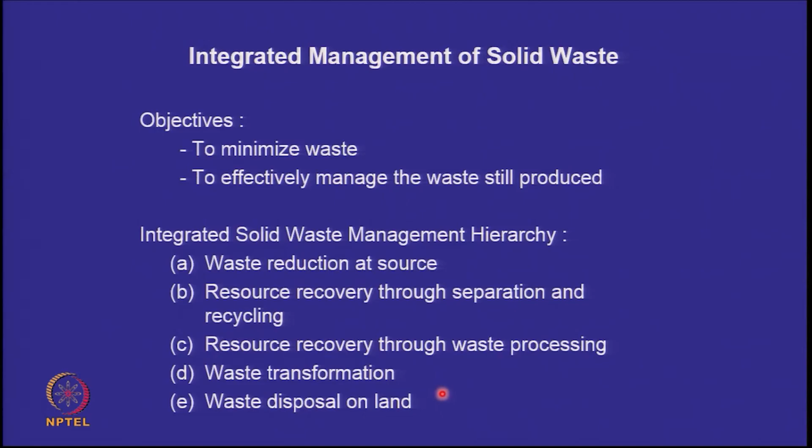And we said that an industrialized society is taking energy and raw materials from the environment and giving out solid waste. The solid waste is produced by the industry, and the solid waste is produced by the consumptive processes in a city.

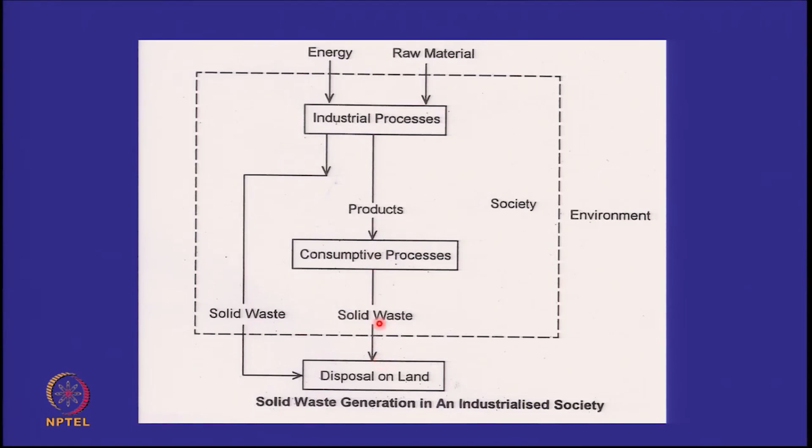And if we apply the principles of integrated solid waste management, we can apply them here to reduce the quantity of waste coming out and sending back the material and the energy to reduce the energy and raw material required by the industry. And similarly, after the consumptive processes, we can send back the material which we can use for recycling, or we can send back the energy by burning combustibles, we can therefore reduce this.

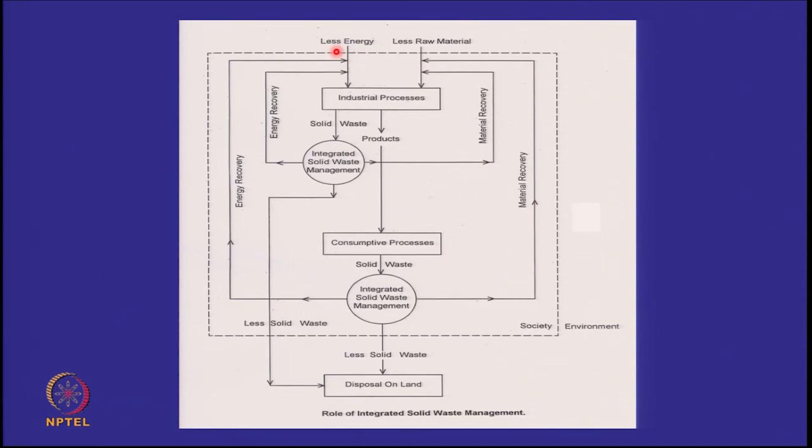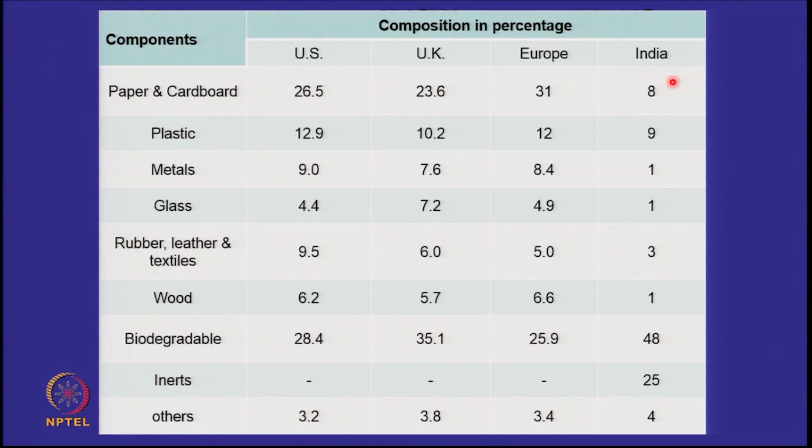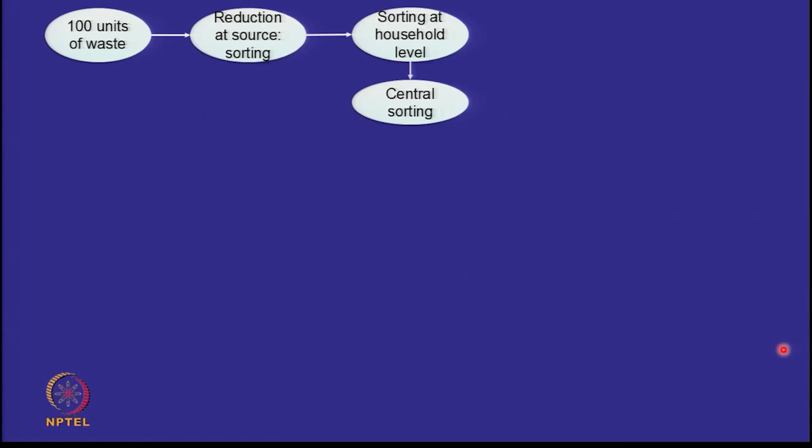So let's recall that we said last time in India the waste composition looks like this. And let's see if you conceptually apply this integrated solid waste management, what can we do? Let us assume that we have 100 units of waste. Then we can reduce the quantity of waste by sorting at the source. This can take the form of sorting at the household level, that means within the houses, and after sorting at the household level, further reduction can also be done at a central sorting unit. That means at a facility where this waste reaches from the various households.

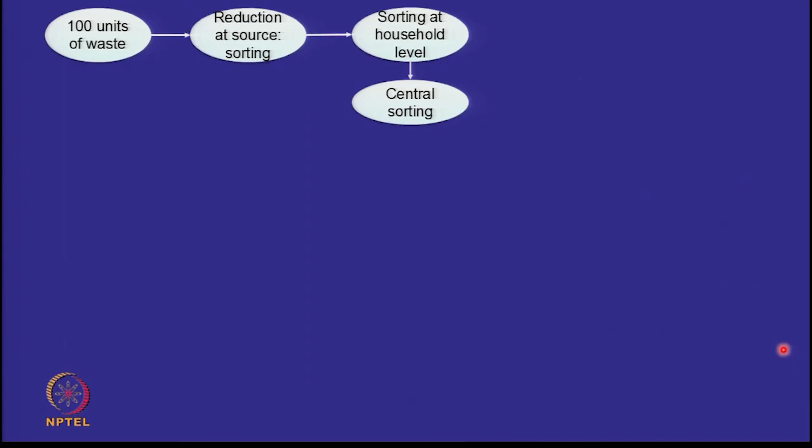At the central sorting facility, you can do manual sorting or mechanized sorting. Manual sorting typically means that the waste is moving on a conveyor belt, and you pick up the various items manually by hands. You are of course wearing gloves, and you are having some kind of a mask to prevent any pollution while you are doing manual sorting.

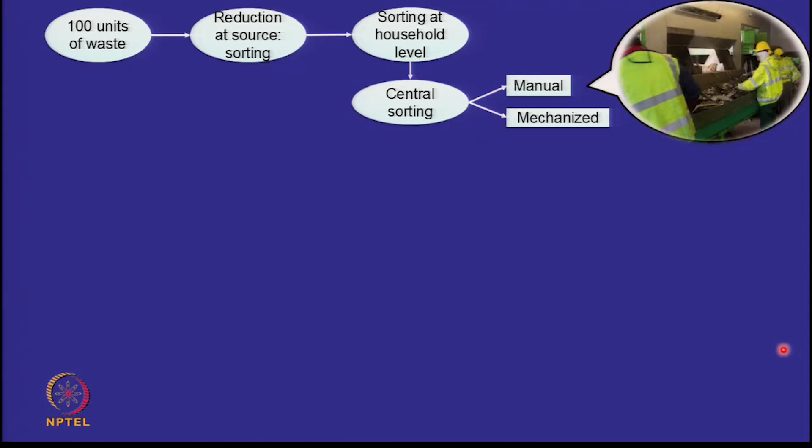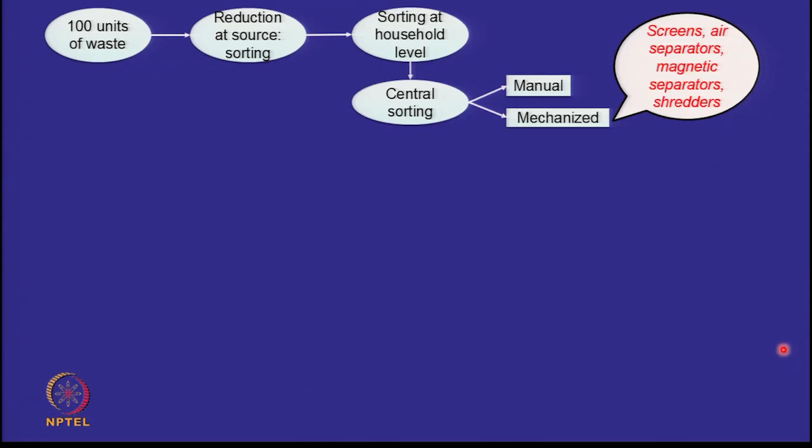The other way of doing sorting in the central plant is by using mechanized equipment such as screens and trommels, air separators which will separate out the lightweight material, magnetic separators which will take out the metallic materials, and even shredders which will cut open the plastic bags to release the recyclables inside the plastic bags. So about 10% of the waste can be reduced by sorting at the household level and at the central sorting unit.

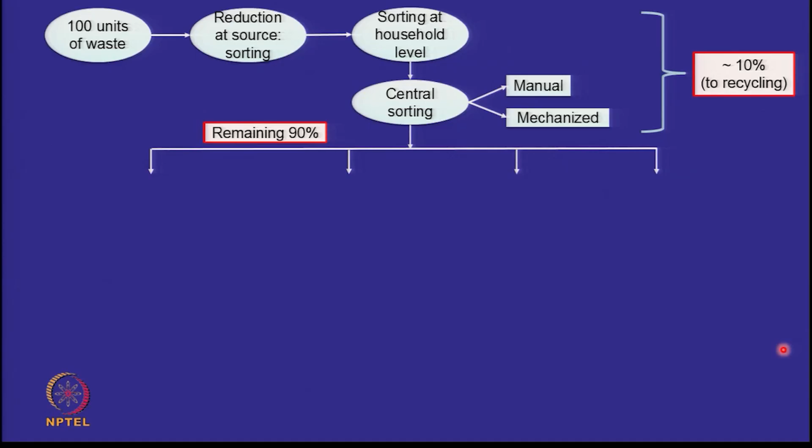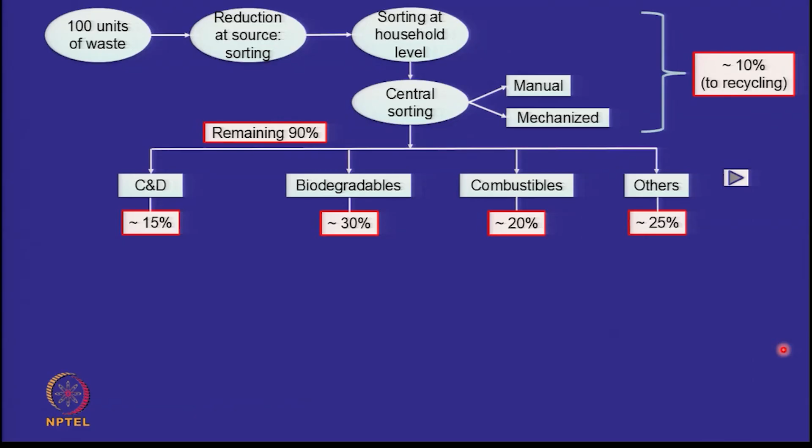The remaining 90% of the waste would be C&D waste, biodegradables, combustibles and others. Typically, the C&D waste may be 15% of the total waste. The biodegradables comprising of the food waste and other waste such as wood and other garden trimmings would be about 30%. The combustibles, which could typically be paper, plastic, cloth and textiles, could be 20%, and others could comprise of intricately mixed material which cannot be separated out into the individual components for recycling.

So, the C&D waste can be sent to a C&D processing plant where it can be processed for reuse in construction. The biodegradables can be sent to a composting plant or a biomethanization plant where the output would be compost, which can be used by the farmers, or the output could be methane gas, which can then be used for producing power.

The combustibles can be sent to a waste to energy plant for generating energy, or the combustibles can be compacted and converted into refuse derived fuel, either in the form of pellets, or it can remain in the uncompacted form as fluff.

Now, at each of these plants there will be some pre-processing rejects, because all the material which reaches the plant is not 100% processable by the equipment in the plant, and after the processing is over there will also be post-processing rejects. For example, when you are doing composting, then after the composting you might sieve the material through 4 millimeter sieve, and the finer material may be the compost and the coarser material may be rejects.

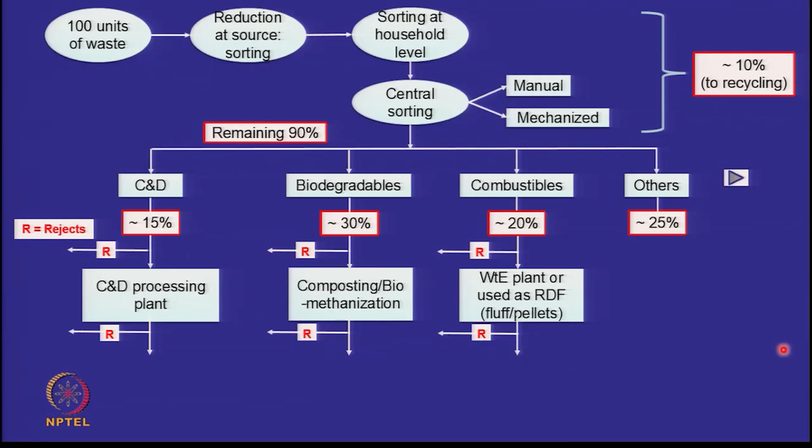So, the product will be the bulk output and the rejects will be the minor output. Typically, all these rejects will go to the landfill, and the rejects which were coming from the others as well, because it is too intricately mixed for reuse, will also come here. So, all these rejects as well as this reject will go to the landfill.

Now, let us see: we started with 100 units of waste, how much of it is going to go into the landfill? We have 15% C&D, and you will have about 15 to 20% rejects. So, 3 units are rejected. Similarly, out of the 30% biodegradables, 8 units are rejects. In the combustibles, you are having 5 units as rejects. So, if I total all these, 3 plus 8 is 11, plus 5 is 16, and 25 which are intricately mixed and cannot be separated, about 41% of the material has to go to the landfills.

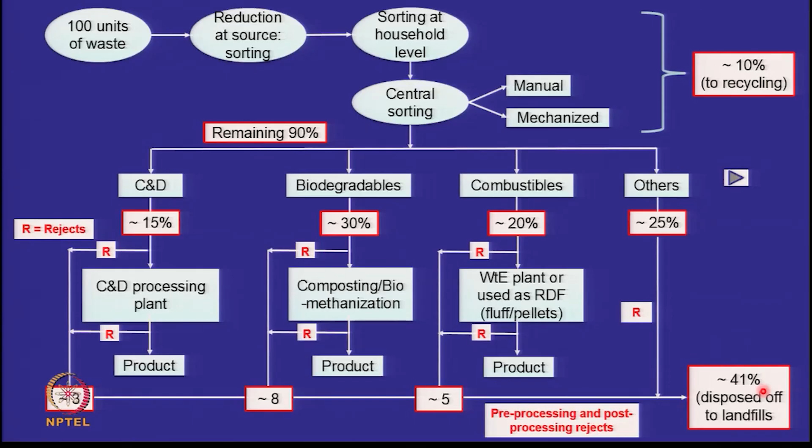So, what good integrated solid waste management does is to reduce 100 units of waste to about 40% or less, and therefore, the size of landfill required is lower. I think I have another diagram here which we can go through. I don't know how clear it is, but it essentially captures what I said.

We started with 100, and we did source sorting, intermediate, central sorting. 10 went back for recycling. Construction and demolition 15. Special waste, sometimes you can't do anything about it. Combustible waste, biodegradable waste. The figures are different here from what we've written on the board. That is not important. What is important is to recognize that there may be some hazardous waste and there will be some mixed waste.

And not shown in this diagram, and that is erroneous, is that from each processing unit, no, it is shown here, from the biodegradable waste you will get rejects. Not shown in the combustible waste, you will have pre-processing rejects as well as ash. Post-processing reject of a waste to energy plant will be ash, and pre-processing will be all that material which they think will not burn. They will return it or say, please take it away. So in this diagram, I think it's about 45.

And this diagram also says or presumes that your city will have 3 types of landfills: the hazardous waste landfill, the non-hazardous waste landfill, and the inert or the construction and demolition waste landfill. And this material will reach these locations.

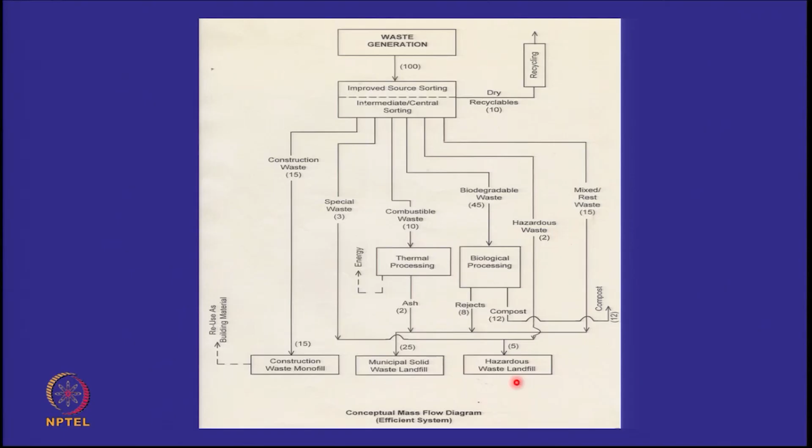So I'd like to look at some recent initiatives in Delhi. We've been trying to process waste for quite some time in India. I mean, the last 20 years we have made lots of investments into waste to energy plants, composting plants. Many of them have been unsuccessful. In fact, it is the rare processing plant which is successful, and the main reason has been the quality of waste reaching the plant. You cannot send mixed waste to a waste to energy plant.

So you will find Bombay City signs a contract for waste to energy. Lucknow signed a contract for waste to energy 10 years ago. It didn't work. I already gave you the example that Delhi did it about a couple of decades ago. It didn't work. So if you send them only the combustibles or the better types of waste, that is what will work. And then the plant has to be designed for those combustibles. If you send them mixed waste, which is predominantly wet, it's not going to work.

And a large number of composting plants have also not worked, because it's not just about composting the whole waste. Once you compost the whole waste, it is going to have wires, it is going to have plastics, and a farmer is not going to pick up that compost. He wants a very high quality compost for his fields. So composting plants have also not worked. We'll come to that later.

But the more recent initiative is that we have 2 construction and demolition waste processing plants in Delhi. Please note, the moment we get into the C&D field, we are able to almost remove 25% to 30% of the waste from the main waste. So that's a huge reduction. And what do you do with C&D waste?

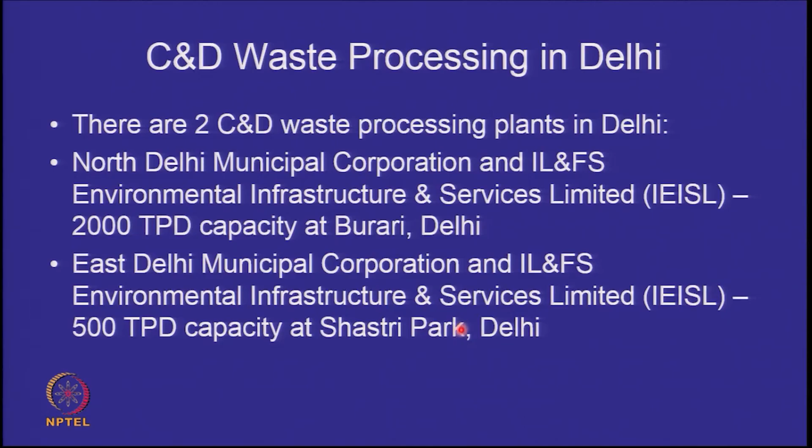So just a few photographs from the Burari plant. So what does a construction and demolition waste plant do? It gets the waste, it crushes it, it removes the metals and the other materials like pieces of wood, and then it sells off this crushed waste by first screening it. Maybe you can get sand out of it, maybe you can get gravel out of it, coarse aggregate, fine aggregate.

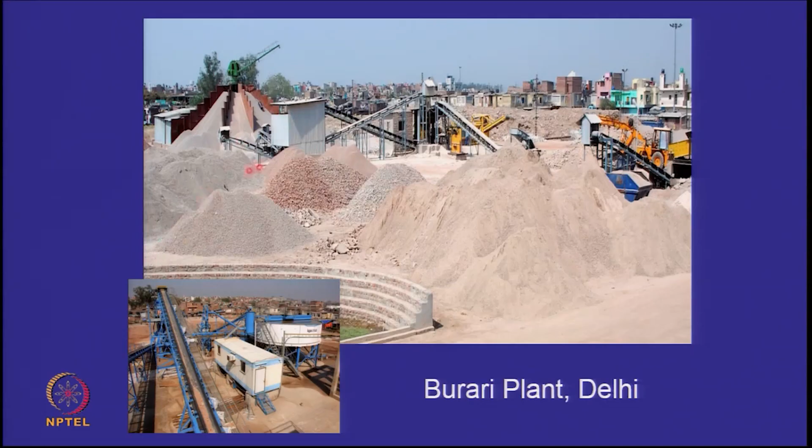So you can see a variety of heaps here. So it's like a crushing and screening plant. The waste will come, it will go to some crushing units, then it will be screened, and then it will be collected and sold off to various people. And sometimes you can also make an end product. So this is the waste which comes in typically.

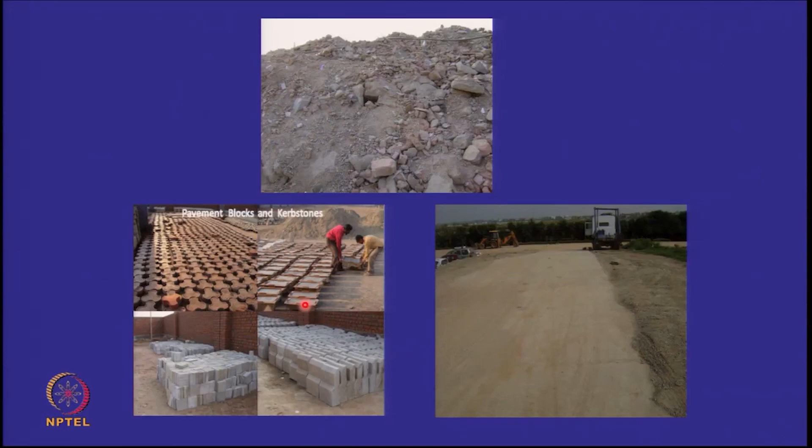If you don't want to do a very high-end job, you don't want to make high-strength concrete from this aggregate, but you can make paver blocks. Paver blocks don't require a very high quality of input coarse and fine aggregate. So they are making paver blocks here.

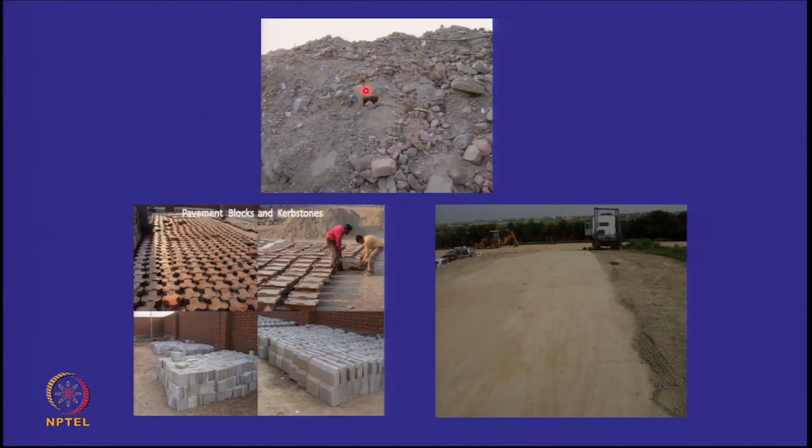Here, the finer portion of the construction and demolition waste, because many times construction and demolition waste will also have some soil mixed in it. When you demolish a building, the foundations will come out, you will be excavating it. When your excavator is taking out the waste, so they have used that finer material in road construction.

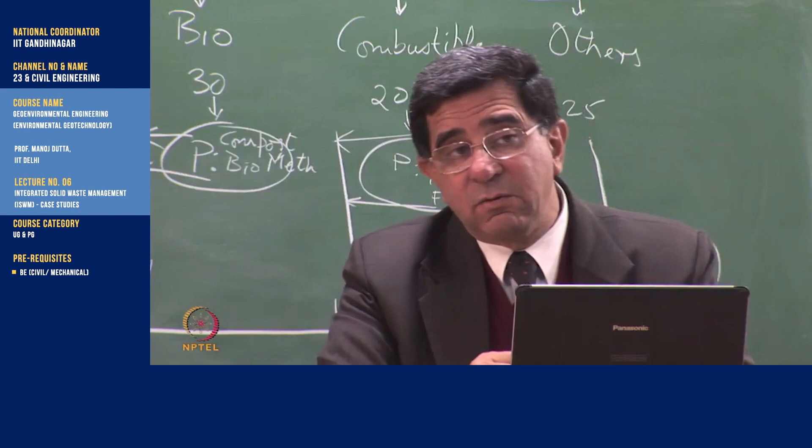So we looked at construction and demolition waste. This plant is now doing well. I think the whole issue is about how you price it. If you are going to price recycled material, should it be lower than the original material or higher? Suppose I can get sand at X hundred rupees per cubic meter. Now I have recycled sand. Should it be less or more?

Yeah, so if I am getting natural sand at 500 rupees per cubic meter, and I start selling my recycled sand at 700 and say I am green technology, sustainable, environmentally friendly, you are making a house, you may be as friendly as you want, I am getting it at 500 rupees, why should I buy the sand at 700 rupees?

So the criticality is, can we price it lower? And if we can't price it lower, let's say 700 rupees is the cost of production, then what is the alternative? We have to be subsidized. And who will give the subsidy? The government. That's where I talked about the hierarchy of waste management options. The maximum subsidy should be given to making recycled materials sustainable. Subsidy should not be given to make landfills cheap. Because if you make landfills cheap, all the waste will come to your landfill.

So we have to reprocess that. So as I said, Burari is successful as long as the pricing becomes successful and the subsidies become successful, which is a huge gray area.

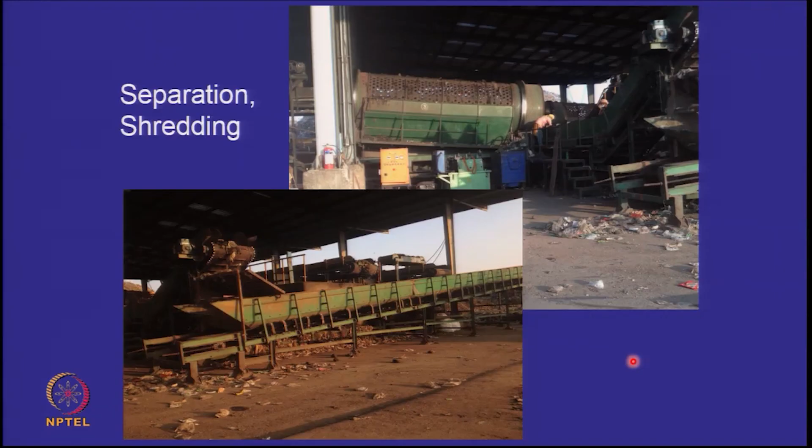So here, what happens? This is the finer fraction, I think this is 20 mm down, of the waste which has come in through trommeling.

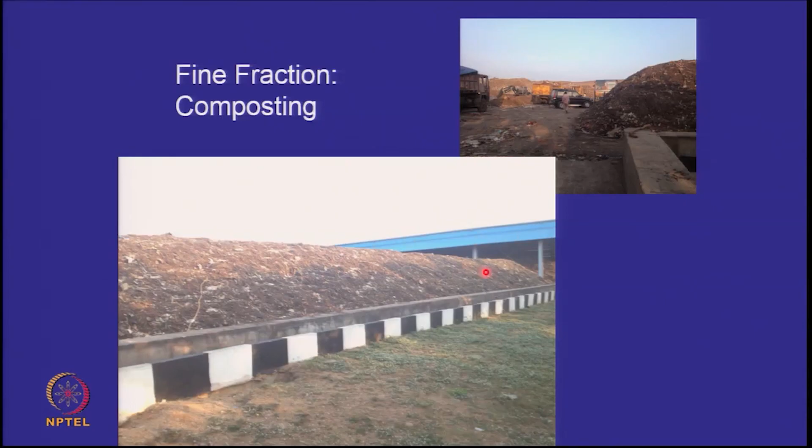Eventually the compost is filled up in bags, available to you like a fertilizer bag. You can see inside the fine compost. There are pre-processing rejects which come out from the screen, and post-processing rejects. After composting is over, they again pass it through the screens, because people buy fine compost - they don't want coarse, sand-like material that won't hold water for plants. So this probably is 5 mm down, and this is packed in bags.

Luckily for us, compost is voluminous. So if a farmer wants it, he needs to carry it in a small tractor or trolley - he can't just take one bag behind a bicycle. If a farmer wants to buy an NPK fertilizer, he can put a bag behind his bicycle and spread it by hand in a field. But compost is a soil conditioner, not a fertilizer. It's like manure, humus, so you need large quantities.

Luckily for us, the Supreme Court has ordered all fertilizer companies that for every few bags of fertilizer sold, they should sell 1 bag of compost. It's incumbent on them to place it in their showrooms. So this compost goes to a fertilizer company, which then disposes of it from its various showrooms. When you go to get petrol filled up in Delhi at various petrol pumps, you will find some bags available - that may be compost from gobar, or cow dung. But even now, municipal solid waste compost is beginning to come into the picture.

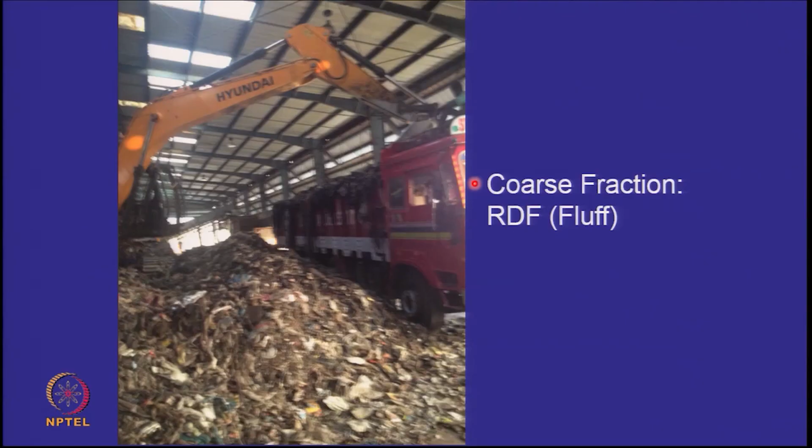What happens to the stuff that was bigger than the 100 mm sieve? That is the coarse fraction - the photograph isn't very sharp, but it has a lot of cloth rags and plastics in it. At this location, the fluff was being sold as fluff, not as pelletized RDF. Please distinguish: RDF can be pelletized or RDF can be fluff. Pelletized means it goes like pellets, small briquettes. Fluff means it goes like this into the feed.

If you are sending this to a cement manufacturing plant for burning, because they need a lot of coal to burn, they have to modify their inflow feed, because this is not like coal. Coal goes in the form of crushed powder into a boiler or furnace to burn. So here the coarse fraction is being sold to one of the cement plants.

So they are handling 1500 tons, but they have some kind of a 25 rule - 25, 25, 25, 25. I asked, what is this 25? He said, 25 is reject, sir. 25 is above 100 mm, which is fluff. And 25 goes into compost, and some 25 is what? There are products of reaction, so don't think everything totals to 100 - they are products of reaction. Already the waste has a pretty high moisture content when it comes in, so 25 will be water. That's a thumb rule - this is not given in any book, please. This is the thumb rule from the private operator.

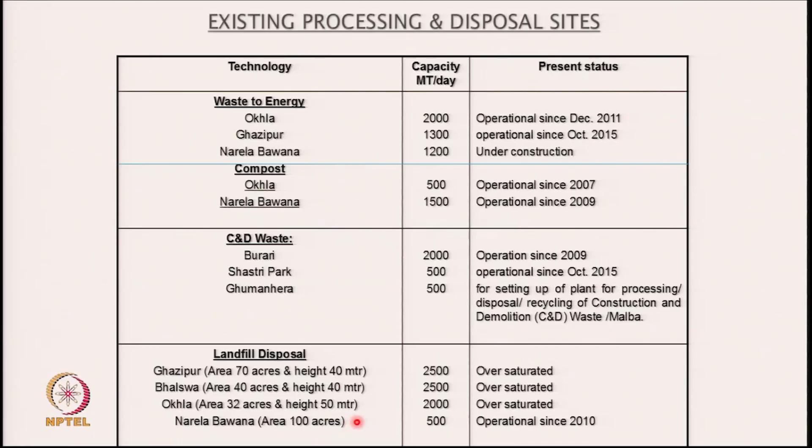We showed our Indian sites - we were the best in showing our dumps. And the Netherlands was the best in showing their processing facilities, because they didn't want big dumps. They can afford it - nothing to be ashamed of. The Chinese didn't show us anything. So it was an issue about transparency versus opacity. There was a lot of presentations in the workshop at the university there.

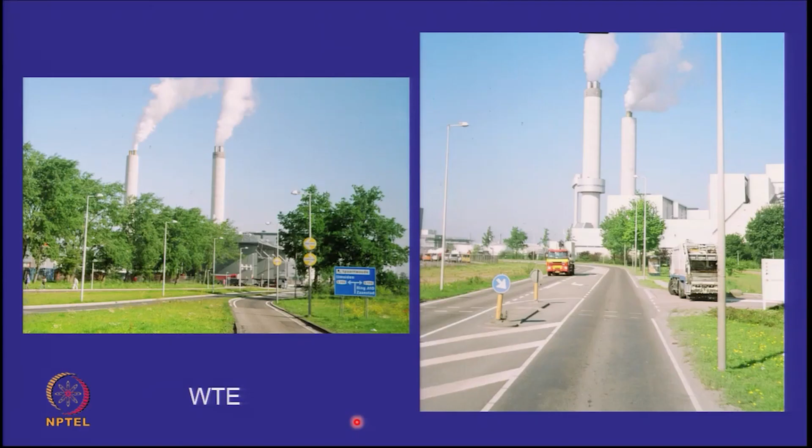That's a huge waste to energy plant in Amsterdam. At that time when we went, I think in 2006 or 7, this was the world's biggest waste to energy plant. That's what it looked like, it looked like a power plant from the inside. You were not allowed much photography, but we got some special permission, and that's the furnace where things were burning.

I don't know whether you can see, but this is a grab. All they were doing is the waste is dumped in a huge room, and a grab picks it up, then it takes it for burning.

Do remember that when a grab picks up a sample from the top, the heavy fines are at the bottom. If there's a soil-like material, the top is the fluff. I'm not saying they were doing this, they probably didn't have the fines, but I'm told the same thing is done at our Okhla plant. You allow the waste to come in and just pick it up. You don't want to set up a pre-sorting unit, it's too expensive. So what do you say? You tell your grab operator, pick it up from the top. If you pick it up from the top, then it's the lighter material - the plastics, the wood, the cloth, and other things. Anyway, it goes to a furnace.

The only message I would like to tell you is that there's a lot of ash which comes out of this. Don't think a little bit of ash - it's a mountain of ash. If you don't know where it ends, even I don't know where it ends. And this is hazardous, by the way.

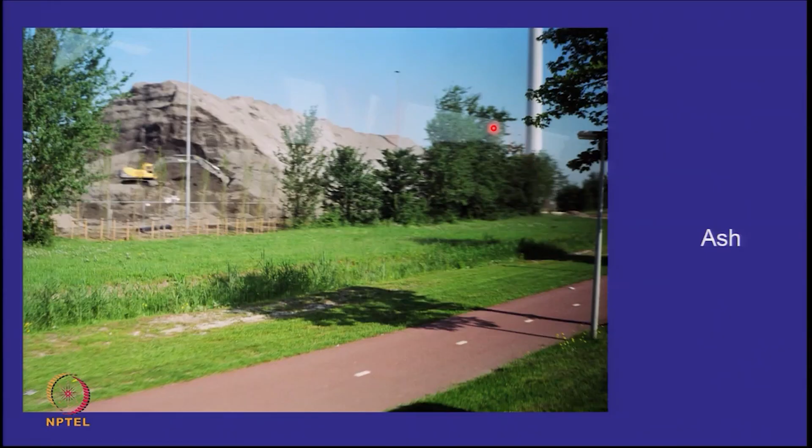A non-hazardous waste - why is it hazardous? Because it has leachable heavy metals on it, so it has to be disposed of in a particular way. Ash may also be non-hazardous, it's not necessary - it depends on what was mixed in your waste. So maybe Indian ash will be non-hazardous, maybe we're not as industrialized, we don't throw so many chemicals into our municipal solid waste. But this has to be put into a hazardous waste landfill, or you have to fractionate it and see which part doesn't have the leachable heavy metals.

When you burn something, the heavy metals also vaporize, and then you cool it, it settles onto the outside. So maybe the fly ash has more heavy metals, the bottom ash may have less, so that has to be seen.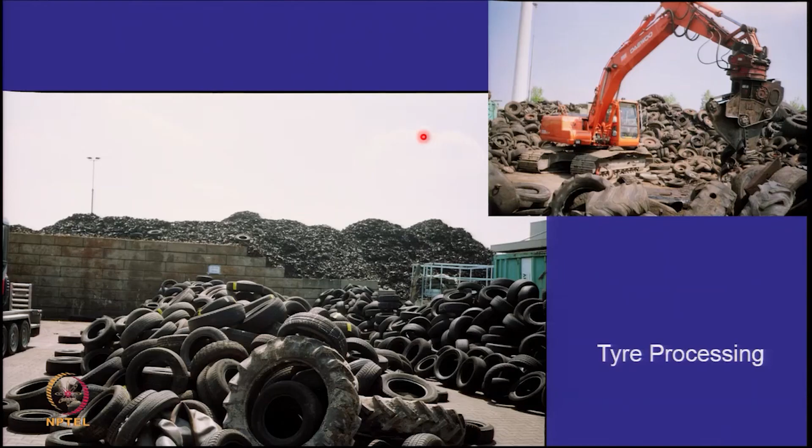They had a separate unit for tires. Tires are difficult to dispose, they are non-biodegradable, and you can recycle and retread, but after that what do you do? So here in Netherlands, you break up the tires and make them into very small pellets, like gravel. The tire pellets can be used to substitute gravel in drainage beds - you have a garden with a drainage bed beneath it, or a golf course, or a football field, so you can use these as a substitute for gravel.

This is a construction and demolition plant in Netherlands. Beautiful - wood would come out separately, the rebars would come out separately, but the important thing to see is what the waste comprises of. This is the large material, and these are the rejects which are coming out, and eventually see this mound. So it's processed construction and demolition waste which you can use, and it's an expensive operation.

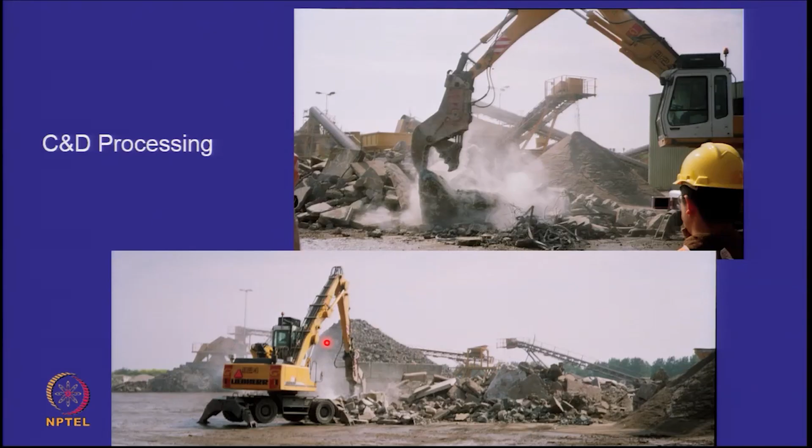And finally, some shots - I just showed you composting at Hyderabad. This is the municipal solid waste, plus I think they were adding a little bit of crop residue or wood shavings, I don't remember. That's the municipal solid waste, so that's the windrow for the composting. That's the moisture being added every day, and that is turning.

So you can't have the windrow very high, because to turn a very high windrow is difficult - you need a lot of mechanization. Here they have it; in some of our places we do it manually. So this is giving you the compost.

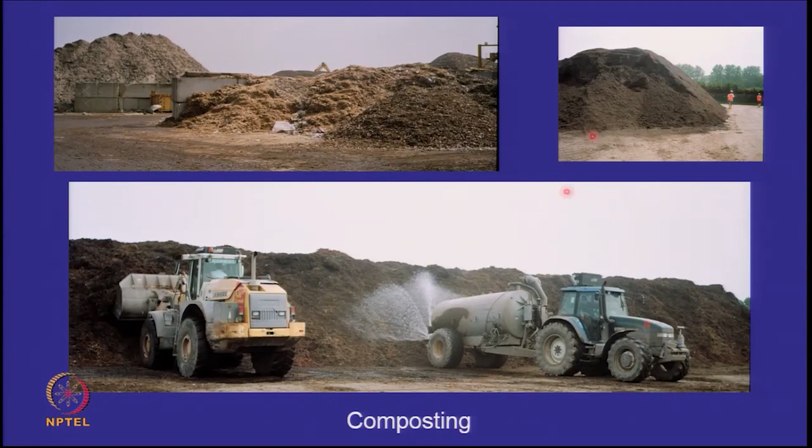Many old composting plants and waste to energy plants have not been commercially successful in India, though they work well in Europe and the Americas. America has a lot of landfilling tradition and a lot of land. Europe has very little land. Japan has no land, so they don't even bother about composting or recovering energy. If they can, fine; if they can't, then it's incineration - putting in money to burn the waste.

So incineration is used as a waste transformation technique, meaning they reduce the volume of waste by burning it. Japan is an island; they don't have land, so they burn everything. Europe is also into composting and burning, and waste to energy is big there. In America, landfilling is more than waste to energy, because there's a lot of public backlash against dioxins and other pollutants, since everything you process has a side effect.

In India, these plants have not worked because of quality of input. You can't use mixed waste to produce anything good - you have to have separate fractions. If you don't have that, you have a problem, and therefore the quality of product will not be good.

Professor Alapat was talking to me yesterday. He's just come back from Shimla after seeing a waste to energy plant. He says, sir, I can't believe it that this pellet is called an RDF pellet. They are making a pellet, but he says it's wet and smelly, meaning it has a biodegradable component. He says there's no way it's going to burn - who in the industry is going to take a wet pellet?

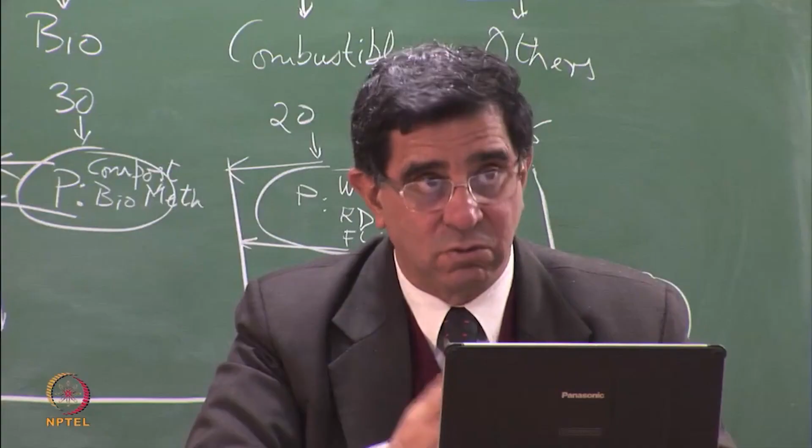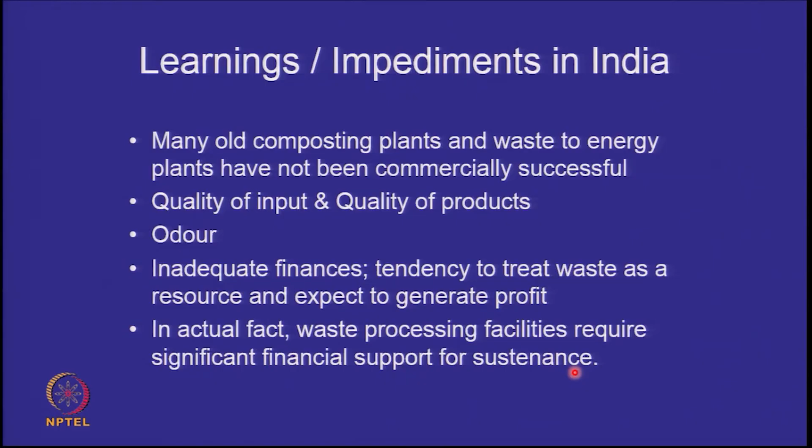So waste processing facilities require significant financial support for sustenance, and that will determine whether we are able to have successful facilities or not, along with good input.

Finally, I want to end this slide. We've only talked about the municipal solid waste management stream, but we also have an industrial waste management stream, a hospital waste management stream. In Delhi there are two thermal power plants, so there's a thermal power plant management stream. Then there are sewage treatment plants - is the sewage sludge hazardous or non-hazardous? Where does it go? And other waste.

So a city will have a lot of streams, and all of them have to be interlinked. Sometimes everybody is doing things in a compartmentalized manner - the Industrial Development Corporation will not talk to the municipal. So how do the wastes go from one stream to another? There are a lot of interlinkages, but nevertheless, integrated solid waste management means please integrate all your streams.

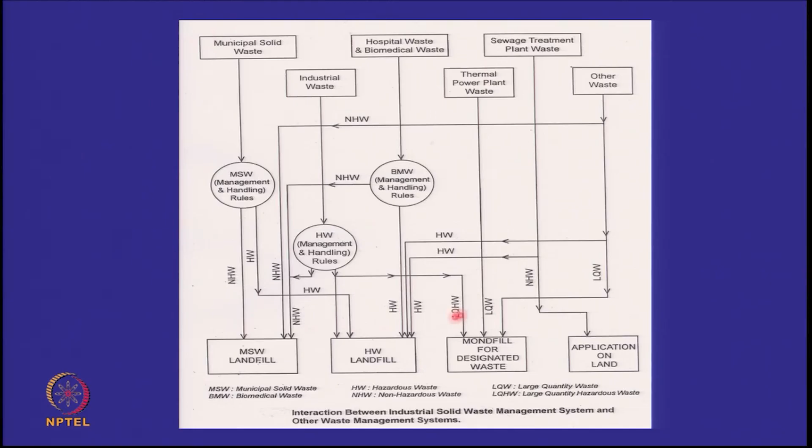So with this, I'd like to end here today - just giving you an overview of how a big city like Delhi is striving to manage its waste. From a perspective of environmental geotechnics, for the 100 units we are producing today, if in the next 3 years we can reduce it to 50, that's a great task we have done. Eventually we may be able to reduce it to 30. I'm not so sure we can make waste disappear within the next decade.